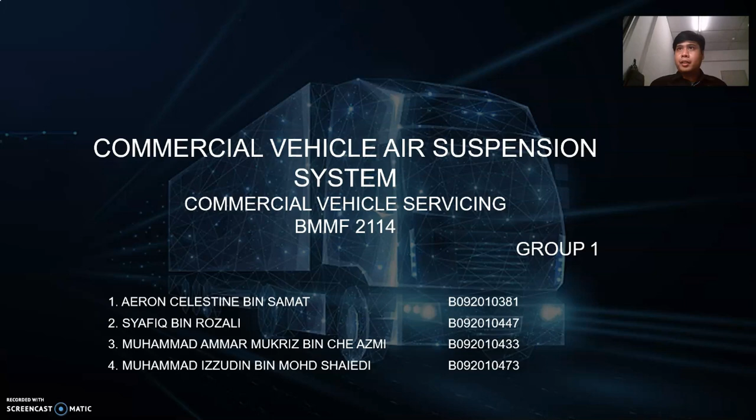First, we will go into the introduction. Our project background is that air suspension is a type of vehicle suspension powered by an engine-driven or electric air pump or compressor. Air suspension replaces conventional steel springs, and its purpose is to provide smooth ride quality and height adjustment by the driver's desire.

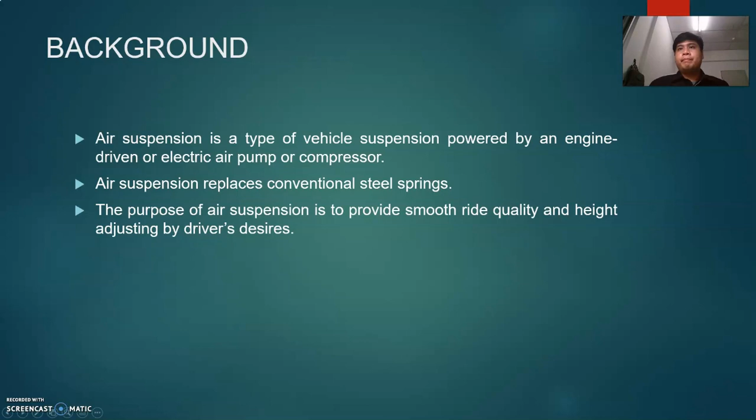The problem statement of our project is that some automotive students are not familiar with the air suspension system, which has become the preferred choice by many commercial vehicle manufacturers. Secondly, the students also did not know how to conduct service or repair on commercial vehicle air suspension.

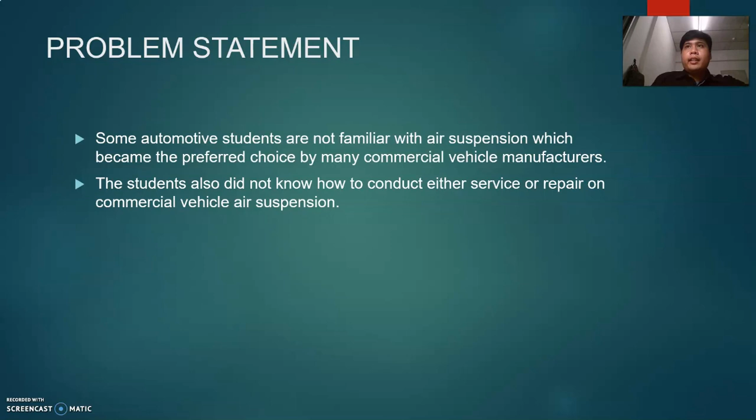This is our project objective: to give a brief to automotive students about commercial vehicle air suspension systems, and to show automotive students the processes of service and repair of the commercial vehicle air suspension system.

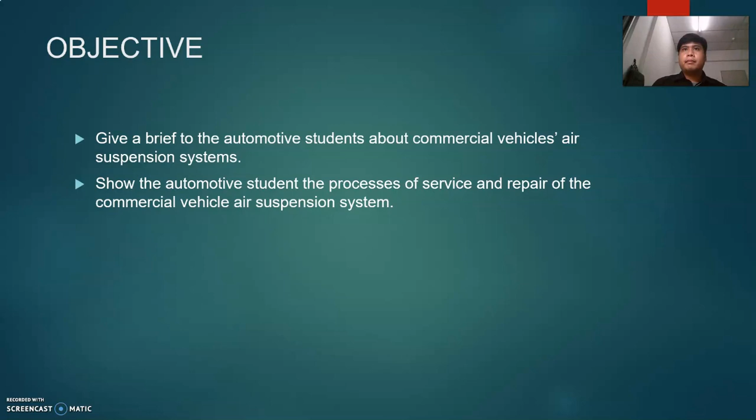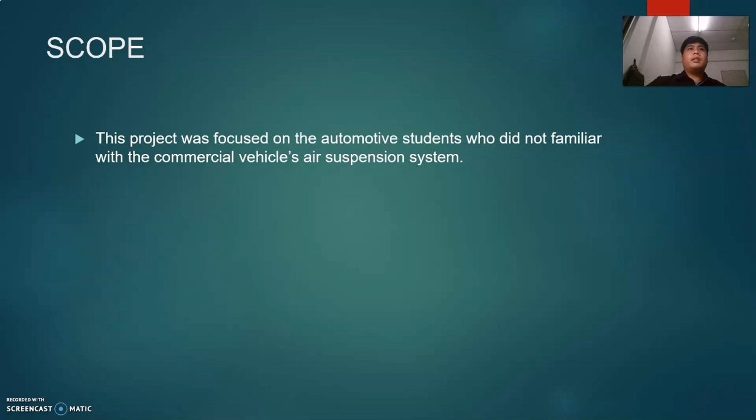This is our project scope. This project was focused on automotive students who were not familiar with the commercial vehicle air suspension system.

This is the significance of the study. This project was conducted to give automotive students new knowledge about commercial vehicle suspension. Once they gain knowledge about commercial vehicle suspension systems, they will not hesitate to conduct service or repair on the commercial vehicle air suspension system.

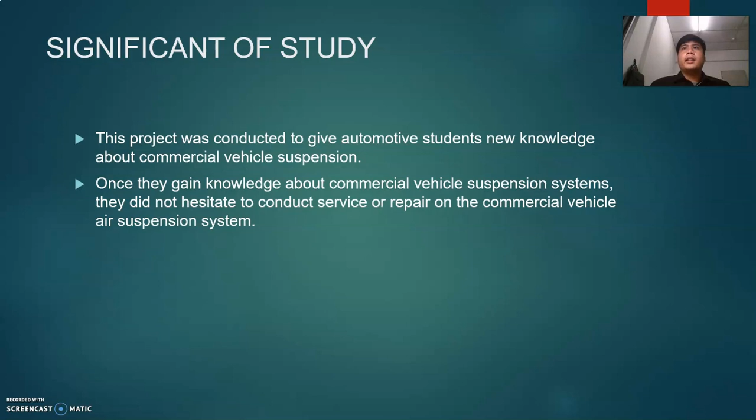Welcome, my name is Shafiq and I will explain the literature review for our project. Air suspension has been widely used in all types of vehicles, not only commercial vehicles.

For commercial vehicles, it is beneficial to have good air suspension and maintenance, because air suspension provides improved cargo protection, which can help reduce claims for damaged freight, says Steve Hampson, Director of Marketing and Business Development at Hendrickson International.

Furthermore, air suspension can also expand the types of cargo that can be transported. He notes that a smoother ride also protects components such as lights and hinges, leading to reduced maintenance costs.

Another benefit of air suspension is that it keeps the vehicle level and at the same height whether loaded or unloaded.

Keeping the vehicle level also reduces wear on vehicle tires, says Graham Brookes, Director of Technology at air spring manufacturer Firestone Industrial Products. If the vehicle is not riding level, there is a risk of tires wearing unevenly, therefore requiring replacements more quickly.

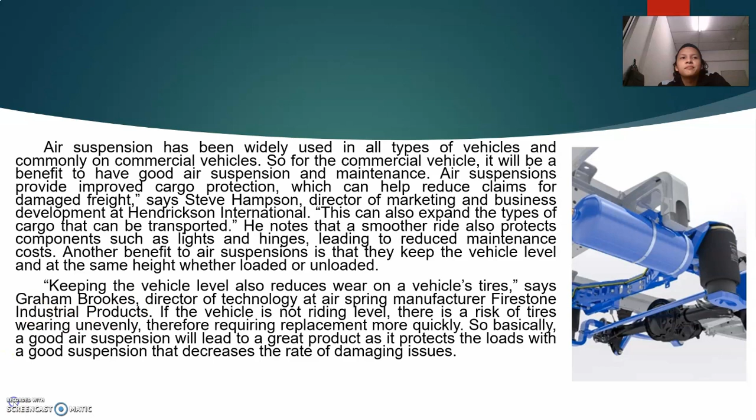I will present the methodology of our project. In this chapter, we will show the guide on servicing the commercial vehicle air suspension system, and show the process of how to conduct repair on an important component that always has issues.

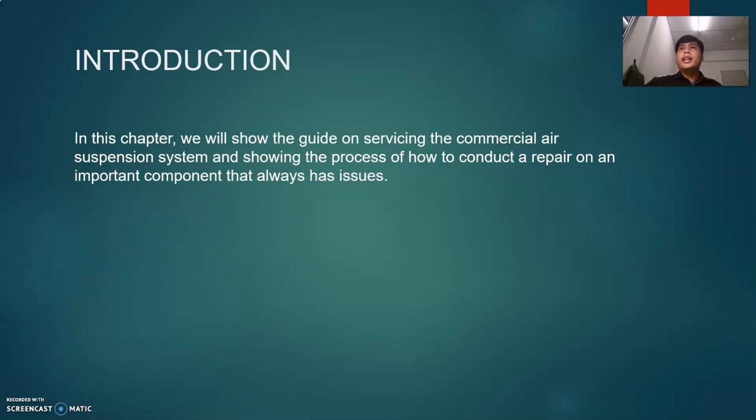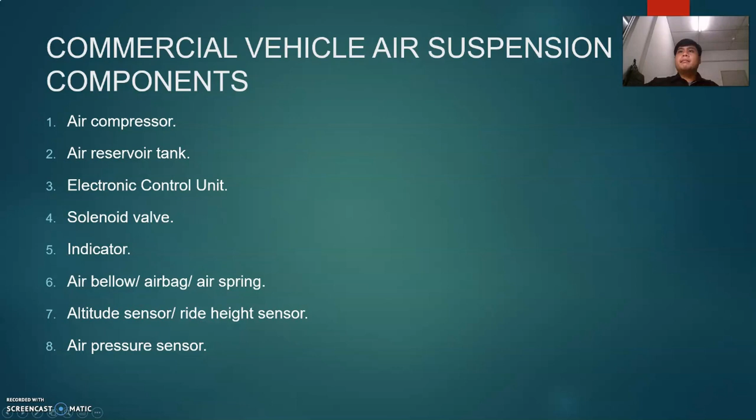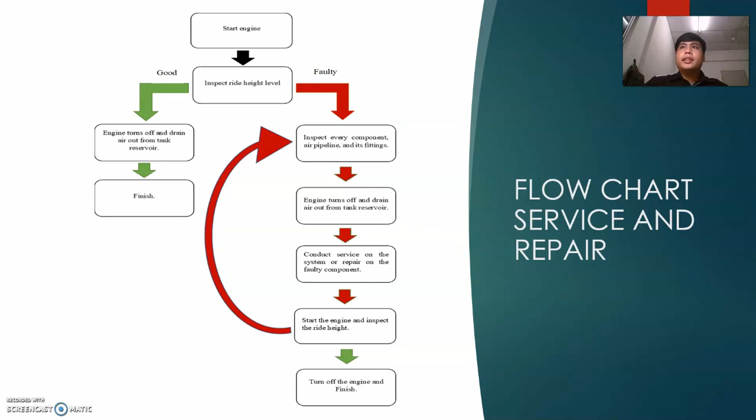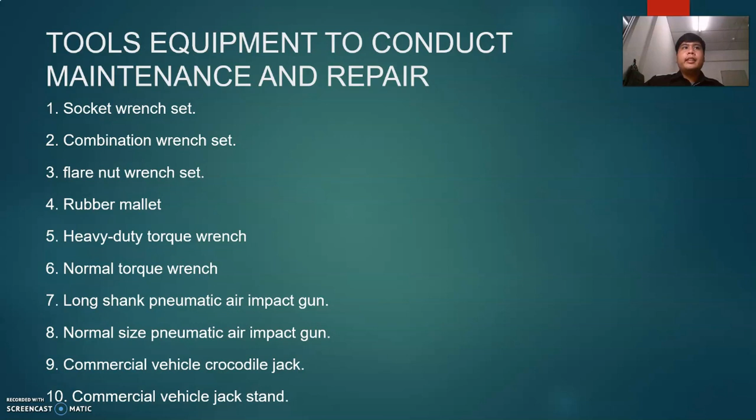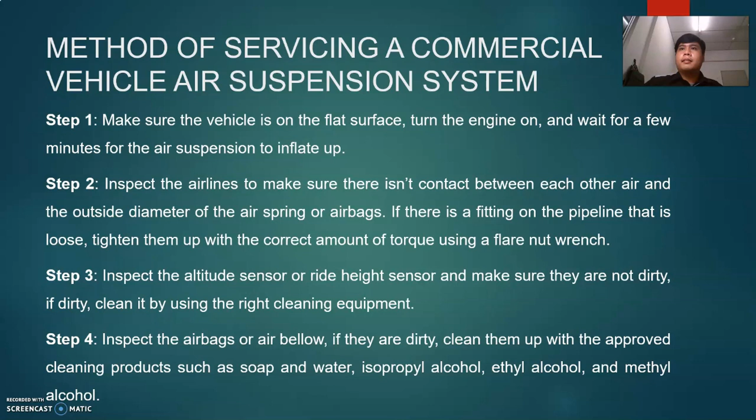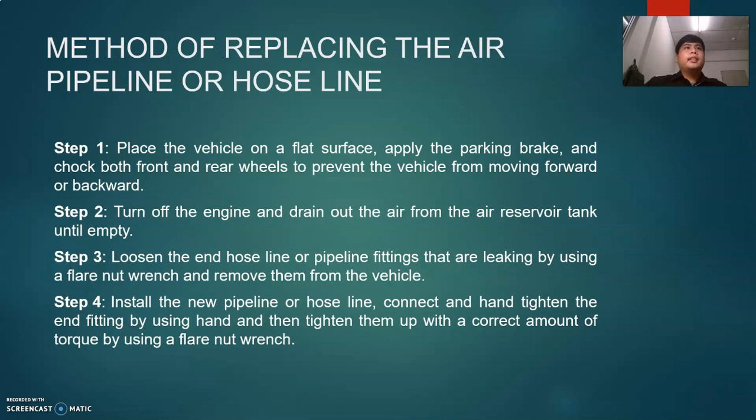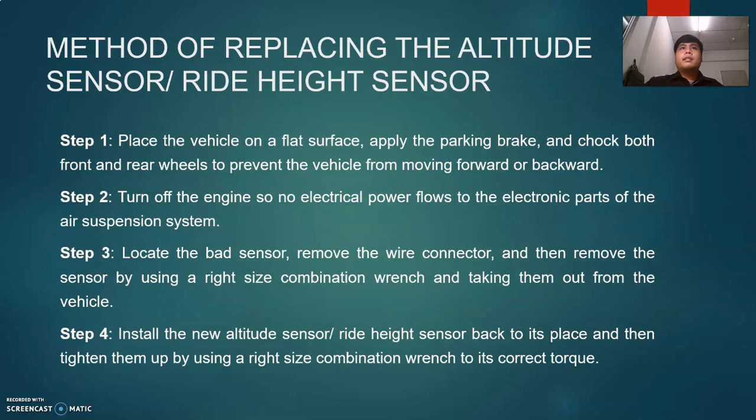This is the method of replacing the altitude sensor or ride height sensor in the air suspension. There are 4 steps that can be followed to conduct replacing the altitude sensor in the air suspension system.

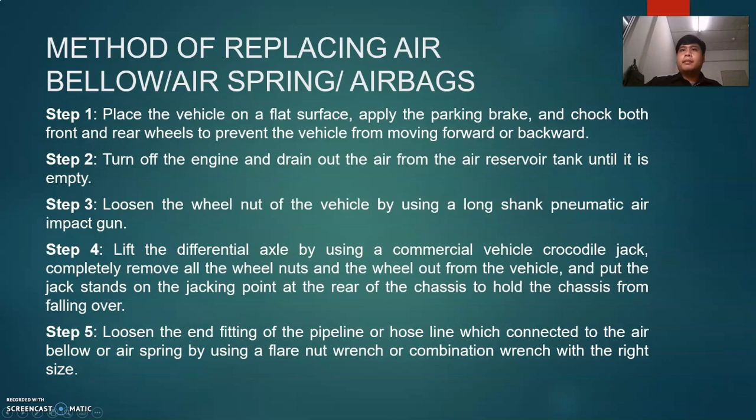In this slide, there are 5 steps to replacing the air bellow of the air suspension. For the next slide, there are 3 steps, from step 6 to step 8, and the last slide covers step 9 to step 11, that can be followed to conduct replacing the air bellow in the air suspension system of a commercial vehicle.

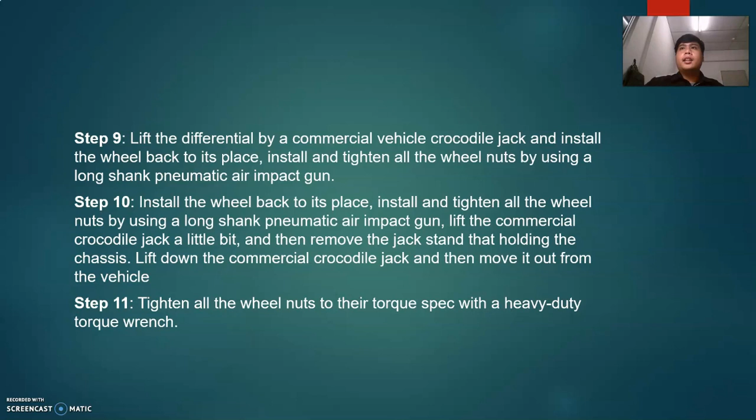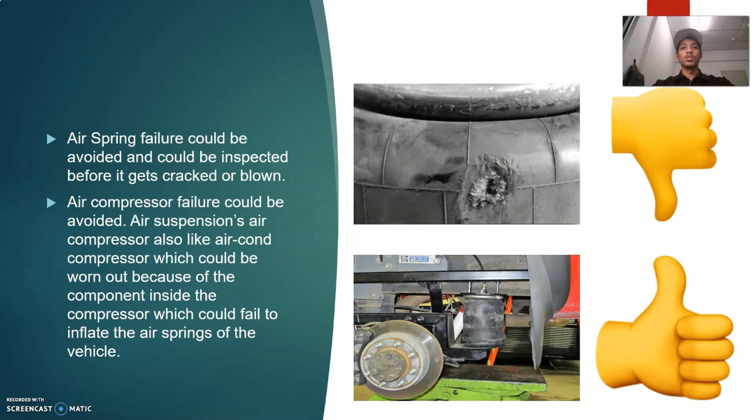The result of servicing or repairing the air suspension system: air spring failure could be avoided and inspected before it gets cracked or blown. After that, air compressor failure could be avoided. The air suspension's air compressor, like an aircon compressor, could be worn out because of the components inside, which could fail to inflate the air springs of the vehicle.

After that, airlines should be secured and leaks should be avoided. This is because the airline is one of the parts that can easily leak, usually because it rubs against another vehicle part.

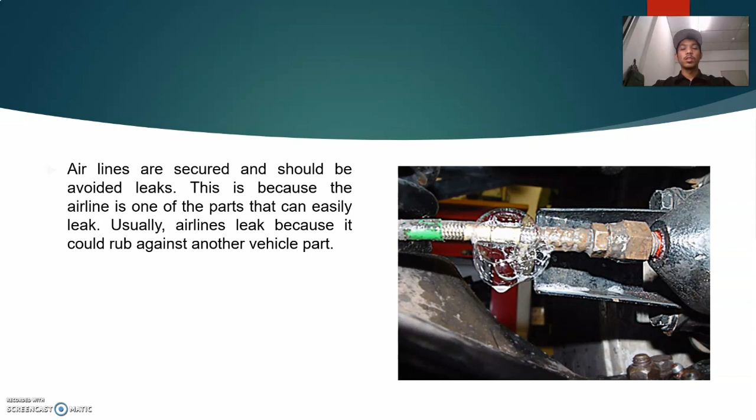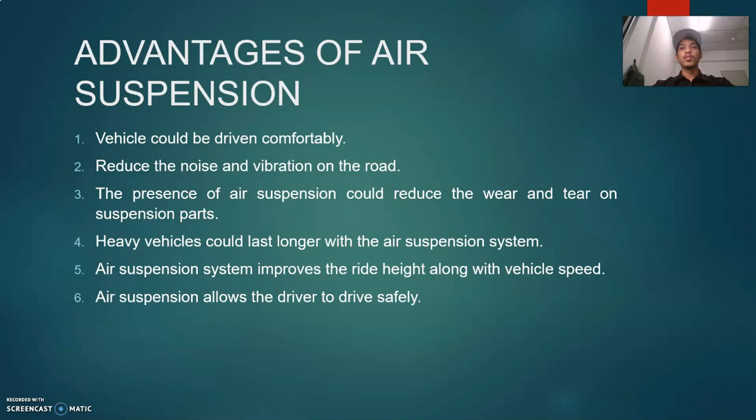Discussion: the advantages of air suspension. Why is air suspension better than other suspension systems? This is because the vehicle can be driven comfortably, it reduces noise and vibration on the road, and the presence of air suspension reduces wear and tear on the suspension parts. Heavy vehicles can last longer with the air suspension system, which also improves ride height along with vehicle speed and allows the driver to drive safely.

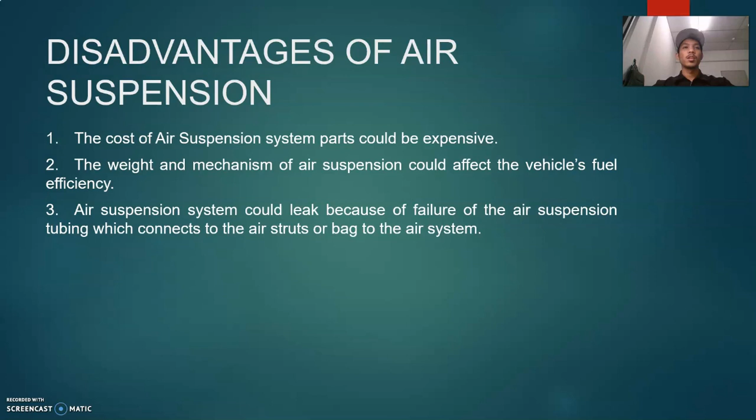The disadvantages of air suspension: the cost of air suspension system parts could be expensive to buy, replace, or install. The weight and mechanism of air suspension could affect the vehicle's fuel efficiency. Air suspension systems could leak due to failure of the tubing, which connects to the air struts or bag to the air system.

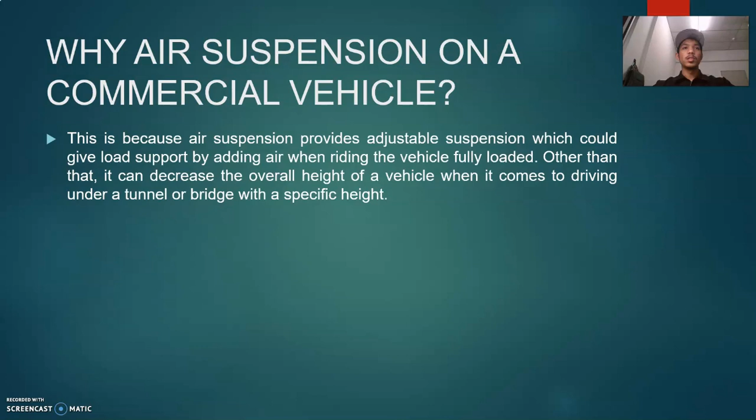Why do we choose air suspension for a commercial vehicle? This is because air suspension provides adjustable suspension, which gives load support by adding air when the vehicle is fully loaded. Other than that, it can decrease the overall height of a vehicle when driving under a tunnel or bridge with a specific height. That's all from me, thank you.

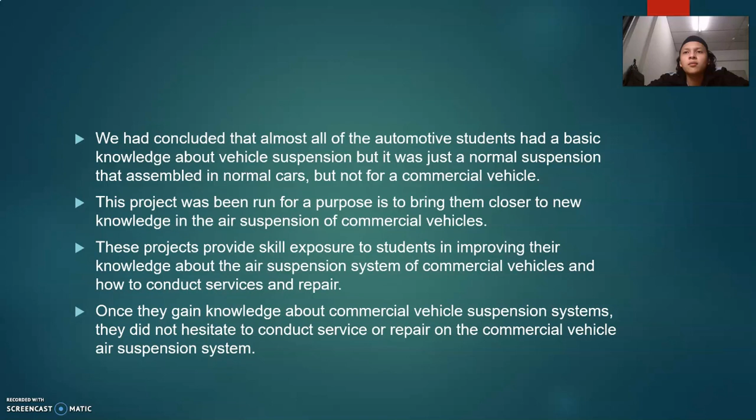So when this project is running, they will learn about two systems. This project will provide skills exposure to students, improving their knowledge about the suspension system of commercial vehicles and how to conduct service and repair, so that once they gain this knowledge, they will not hesitate to conduct service or repair on commercial vehicle suspension systems.

From this project, we know that most students will gain a lot of knowledge about this suspension system and its maintenance, because we included a flowchart of the system. This makes it easier for them to understand the process, including the names of the components, their functions, and the location of each component.

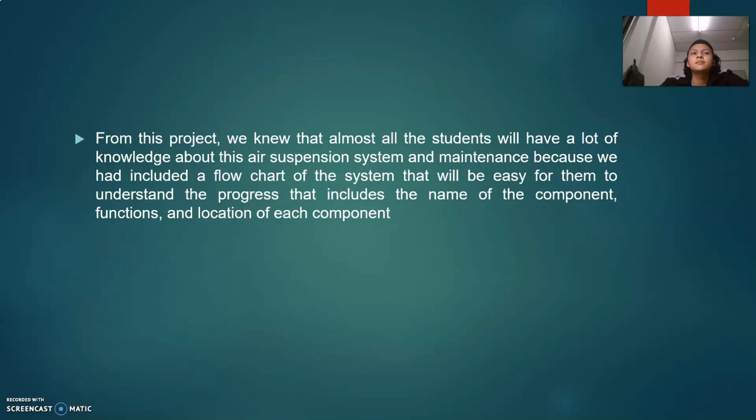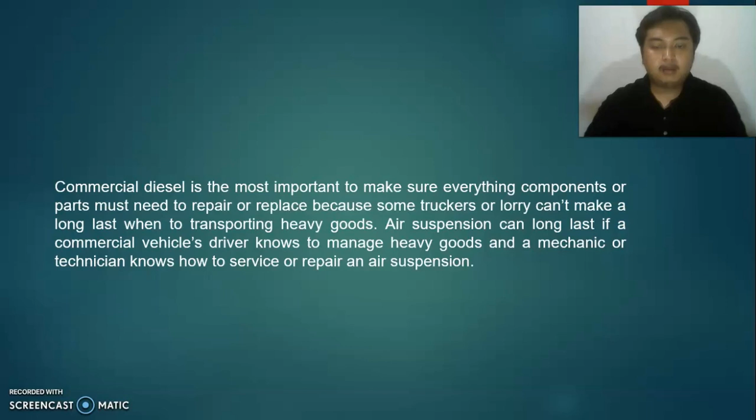Maintenance is most important to make sure every component or part is repaired or replaced when needed, because some truckers or lorries cannot last long when transporting heavy goods. Air suspension can last longer if a commercial vehicle driver knows how to manage heavy goods, and a mechanic or technician knows how to service or repair an air suspension. That's all from my presentation and my group's presentation, thank you.